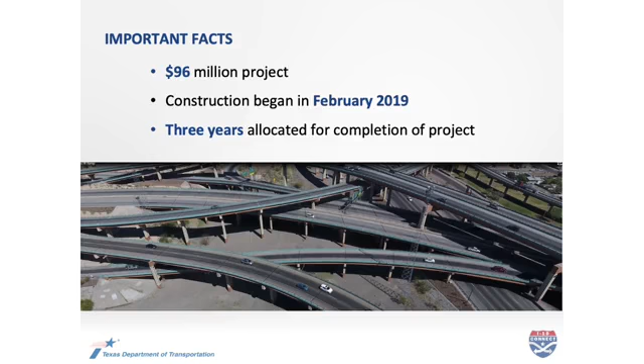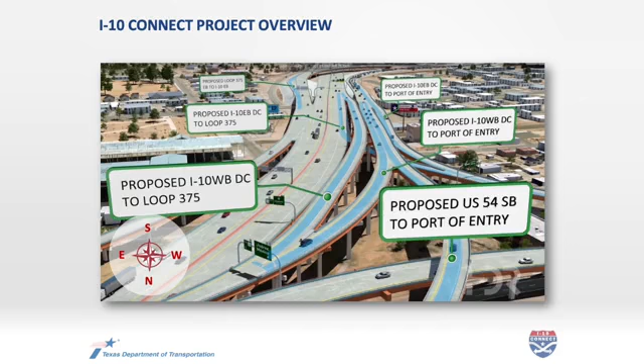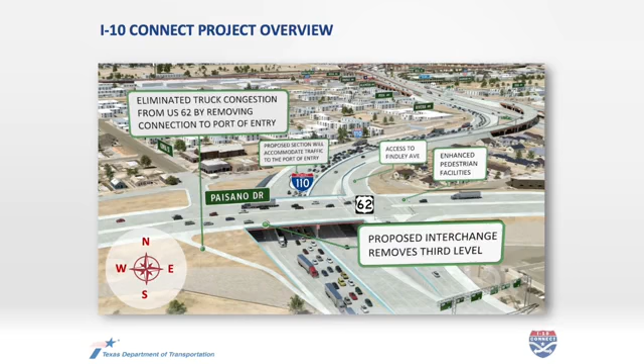Now we're going to talk a little bit about some of the changes you'll see coming up in the next week. Everything we talked about so far is just what the project will look like when it's all said and done, but as I mentioned, there's still many miles yet to go until we get there.

Let's move forward to April 13th. More closures on US 54. This one will impact traffic heading to Juarez. So pay very close attention to this one if you're heading to the Bridge of the Americas, if you plan to head to the Bridge of the Americas on the evening of the 13th.

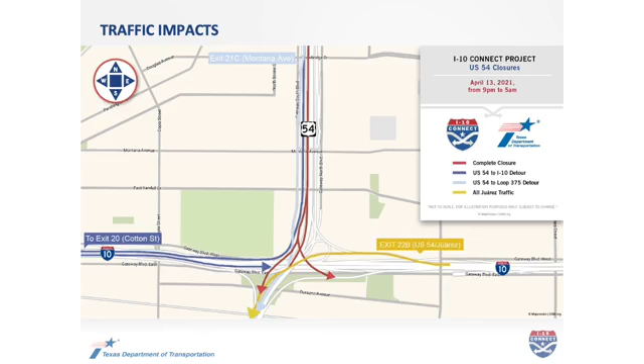Before we go any further, I want to share that right now we have a closure scheduled on the 12th, a closure scheduled on the 13th. There's no closure scheduled on the 14th, primarily because crews want to save that night, and they may slide the closure from the 12th onto that vacant night, or they may extend the closure from the 13th. So it's really important to remain with us on Facebook, on Twitter, sign up for the e-newsletter so we can get you the latest information, because there are still some things that may be changing as the week progresses.

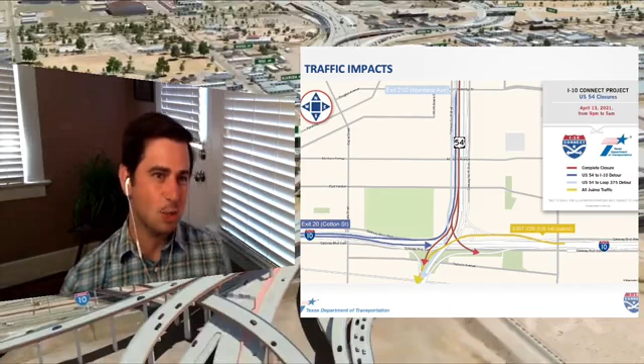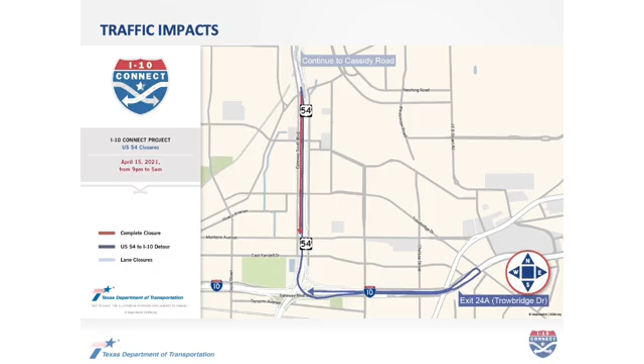Again, all these are overnight closures, and closures which have been in place previously on this project. But the big bulk of the impact will be on US 54 next week as far as complete closures. All right, so those are some of the near-term impacts which are coming up. We want to talk now about something that's a little bit further out into the future.

We know that big question for so many folks has always been, how do I get to the Bridge of the Americas? We know that has been a big change for a lot of folks, so we have it broken down direction by direction, depending on where you're coming from. Westbound I-10, so you're coming from, let's say, Cielo Vista Mall, trying to get to the Bridge of the Americas, there's no real change for you. All you do is take that exit 22B, US 54, then keep left to Juarez as you have for years and years and years. If you're on eastbound I-10, leaving downtown, things get a little more tricky for you.

What you'll need to do is continue on the freeway out to Trowbridge, turn around at Trowbridge, then head back towards downtown, and take exit 22B to get to Juarez. Now, we've heard from many of you and seen it ourselves, sometimes that ramp to Juarez backs up a little because of the temporary configuration. So if you see that ramp to southbound Juarez backing up, go north on US 54, use the Pershing detour, and follow the signs to Juarez to approach the new ramp from a different direction. We like to say we're not stuck in traffic, we are traffic.

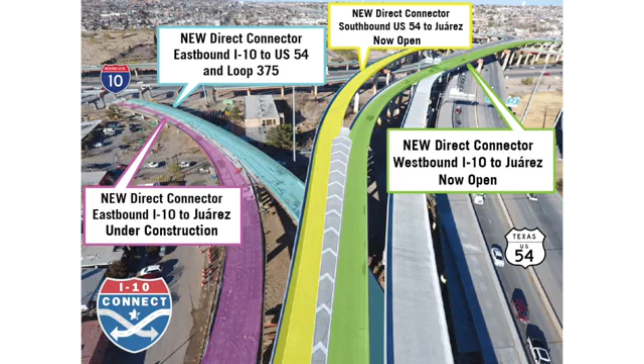All right, let's keep heading down the road, literally and metaphorically. We're going to head down US 54 and show you some changes taking place immediately north of the Bridge of the Americas. This is a big change coming up, both short-term and long-term, so we really want to get you oriented before going further into this presentation.

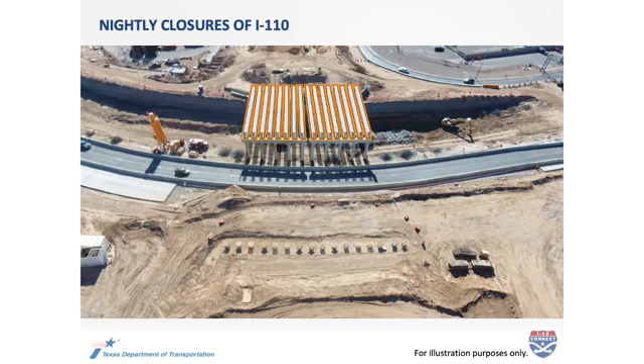Once all those girders are in place, we will have traffic impacts for vehicles heading south on Interstate 110 into Juarez. More than a dozen concrete and steel bridge girders have to be placed over those two southbound lanes of Interstate 110. There's absolutely no way that can be done with traffic flowing south. So to minimize the impact, there will be a series of overnight closures, think on the order of 9 p.m. to 5 a.m., exact times and dates to be determined, for crews to begin placing those bridge girders over southbound Interstate 110.

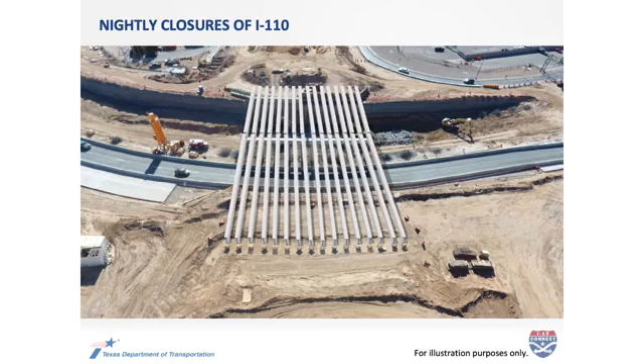We want to give you as much warning as possible that in the coming weeks and months, we will have an extended series of closures of southbound Interstate 110 leading to the Bridge of the Americas. As you'll recall, southbound I-110 is the only road leading to the bridge, so during those overnight closures there will be no southbound vehicular access. We know this will impact a lot of people's travel, and we'll do everything we can on the exact timing and dates to take that into account, but that work just has to be done.

So again, we know that those overnight closures of Interstate 110 are going to be very impactful, but also just want to remind you that there is some payoff at the end in terms of more storage capacity for vehicles waiting to get south onto the Bridge of the Americas.

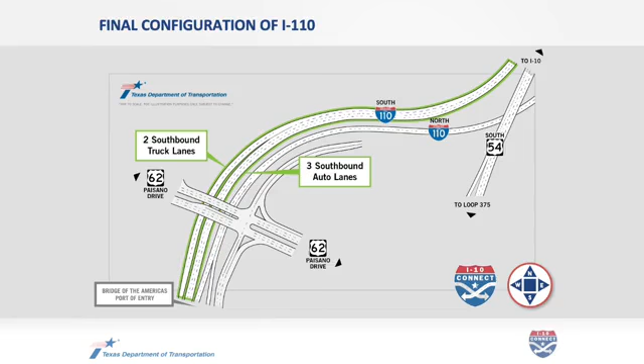All right, so again, there's a lot that is kind of in flux over the next weeks and months. So the best way to stay up to date, sign up for text alerts. Go to i10connectelpaso.com. We are more than happy to provide bilingual text message alerts whenever we have major or last minute changes in traffic control.

For example, earlier this week, we had a closure that went a little bit longer than expected. So we sent out a text, hopefully folks got it before they left the office and were able to manage their evening commutes accordingly. So text message alerts, one great way to stay up to date.

Another way we would really encourage folks to stay up to date is old-fashioned telephone. If you have a question, pick up the phone, give us a call, 855-463-1010. That's our bilingual project hotline. That is not an emergency line, that is a question and answer line. So if you have an urgent question, or see something out there in the world, like a traffic accident, do not report it to this number. This is a way to get a response back within 24 hours on maybe upcoming traffic control.

For example, I think a couple of months ago, we had a really great call from somebody who was just asking that simple question, how do I get to Juarez? We are more than happy to answer those questions, and any other questions you might have about the project, by calling us at 855-463-1010. We're also happy to be here with you on the first Tuesday of every month.

So that means we're looking now at our next meeting streamed live Tuesday, May 4th at 5:30 p.m. Hopefully we'll have some more progress to report to you then. So again, that's just kind of a look at some of the changes that are coming up in the project.